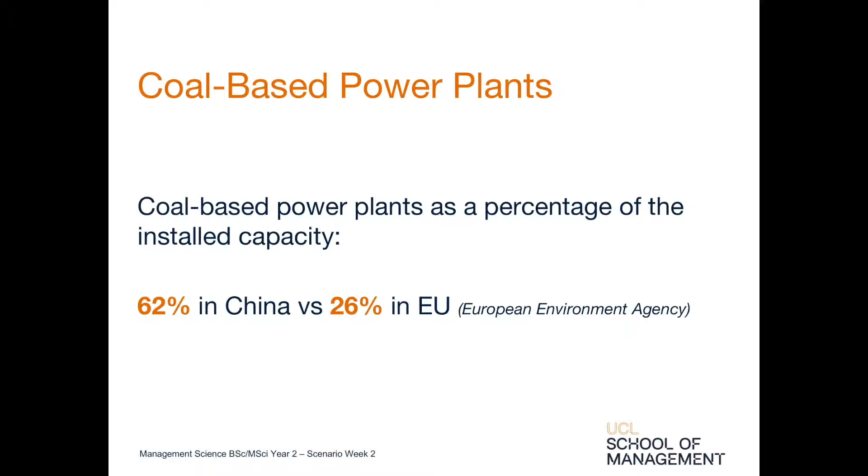China's 12th five-year plan from 2011 to 2015 explicitly called for the retirement of small, aging and inefficient coal plants. The plan introduced a national carbon trading scheme after 2020, while in 2011, 6 provinces and cities were given a mandate to pilot test a carbon pricing system scheduled to launch as early as 2013. Regulations became stringent where PM 2.5 emissions from new plants after 2012 could not exceed 20 mg per normal cubic meter. Regulations on existing plants soon followed after 2014.

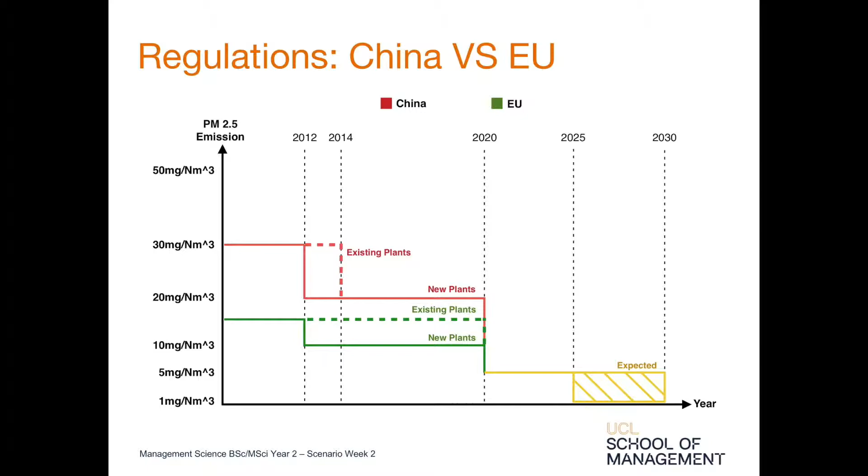The European Union, on the other hand, had stricter regulations on PM 2.5 emissions prior to 2012, at 15 mg per normal cubic meter. According to the regulatory report by the International Energy Agency, new regulations imposed until 2020 included a maximum PM 2.5 emission of 10 mg per normal cubic meter. The report also expects regulations in both regions to be tighter after 2020, capping PM 2.5 emissions to a maximum of 5 mg per normal cubic meter.

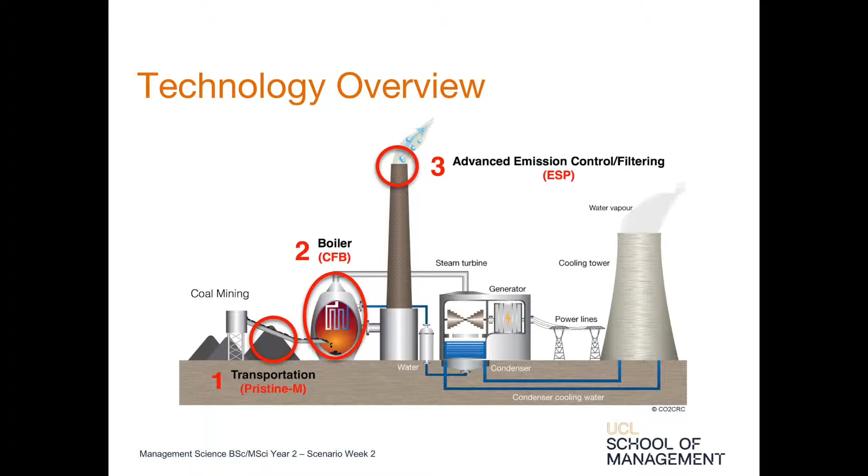This video will focus on 3 key technologies: Pristine M, circulating fluidized bed, and electrostatic precipitators.

We can classify coal upon its stability and quality. Unstable coal emits large quantities of particulate matter in the air during transportation. The specific type of particulate matter released is known as PM 2.5, which is transported long distances and suspended in the air for a prolonged amount of time.

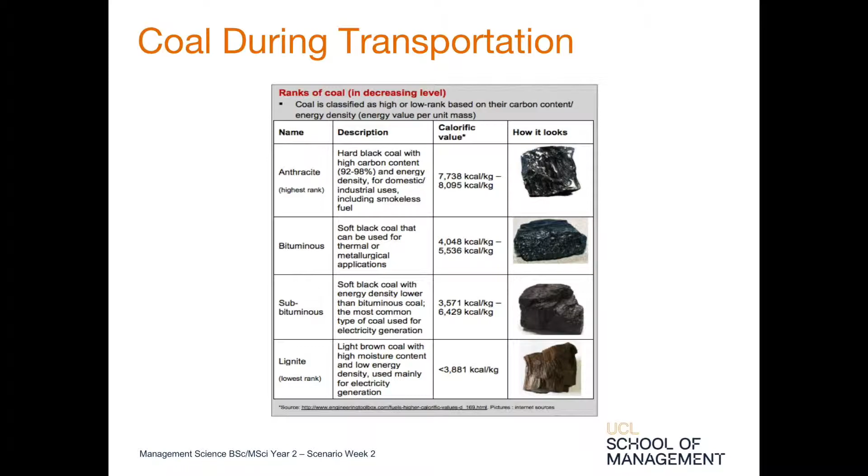To meet future regulations, particulate matter could be reduced at this stage by making the coal more stable. Regulations around the world are getting more stringent, and we can assume most countries will ban the use of low-rank coal due to its instability and high pollutant characteristics. China, which accounts for 45% of global coal consumption, has banned imports of low-rank coal with ash content higher than 16%, sulfur content higher than 1%, and particulate matter above 20 mg per normal cubic meter.

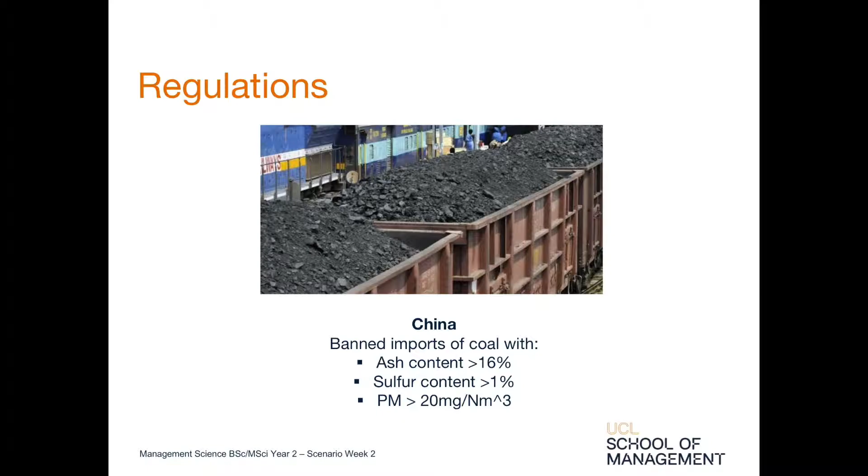Having a higher ranked, stable coal will enable Adaro to keep exporting sustainable energy for use.

By looking closer at this company, we found one of its newest technologies, Pristine M. The technology, just tested last August and validated in October, upgrades low and medium rank coal into premium fuel. Pristine M extracts the volatiles and moisture from coal in liquid form and then coats the coal with it.

This fills in the pores and makes the coal stable and good for transport. It removes moisture from 50% to 10% and improves the calorific content to 6,668 kilocalories, as well as lowering pollutants and increasing efficiency when burnt.

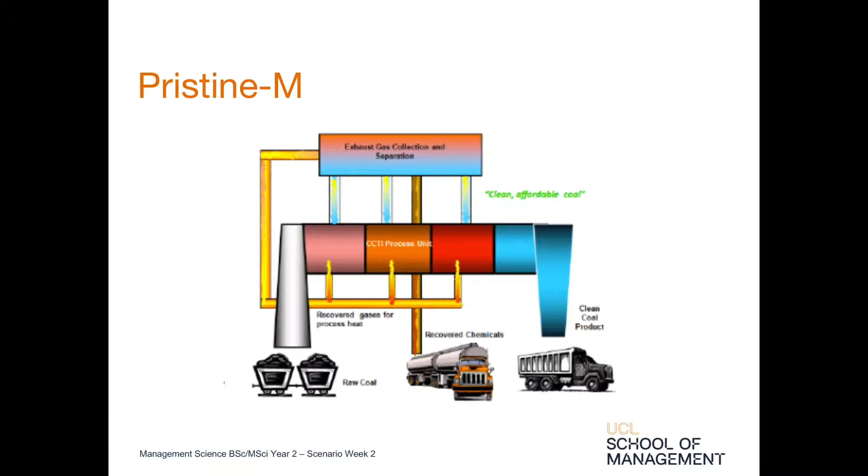So how about the cost efficiency of this technology? As we can see on the table, this technology doesn't only help reduce PM by creating a stable coal, but also multiplies the market price of coal by 2.5 times.

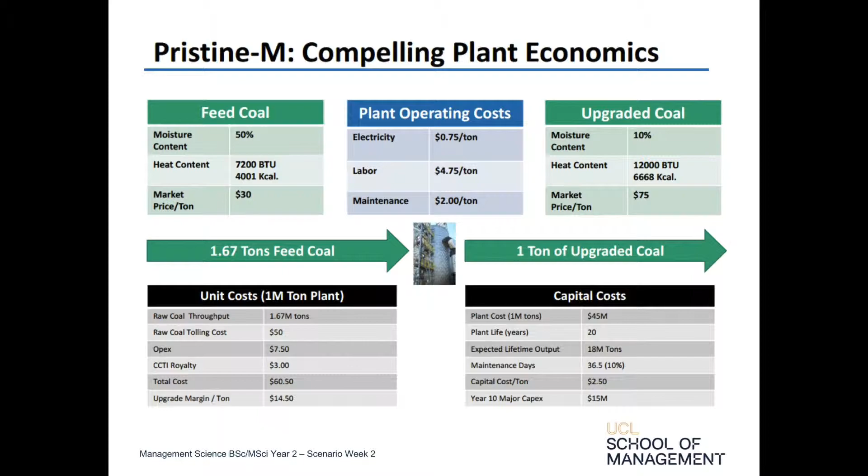The table also illustrates the cost of the technology in electricity, labor, maintenance, and capital costs. This technology has an expected life of 20 years for a price of $2.50 per ton. Pristine M will enable us to have a stable coal for good transport use and meet future regulations.

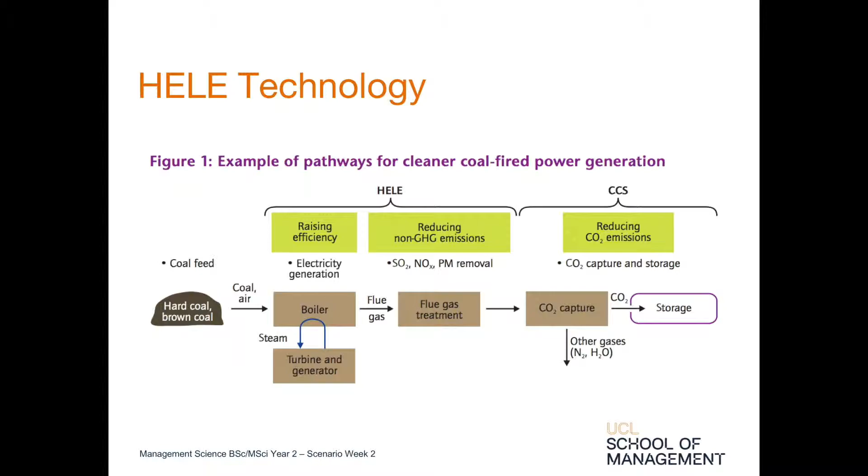HELE technology stands for High Efficiency, Low Emissions Coal Technologies. They incorporate measures to raise both plant efficiencies and reduce non-GHG emissions.

PC boilers had maintained a dominant role in coal power generation since the early 20th century. However, more recent boiler technologies have been developed to replace the original PC-powered plants. The two main technologies are IGCC and CFBC. We decided to focus on CFBC technology due to its similarity to the original PC units and its potential for economical retrofit of aged PC boilers with the relatively new CFB technology.

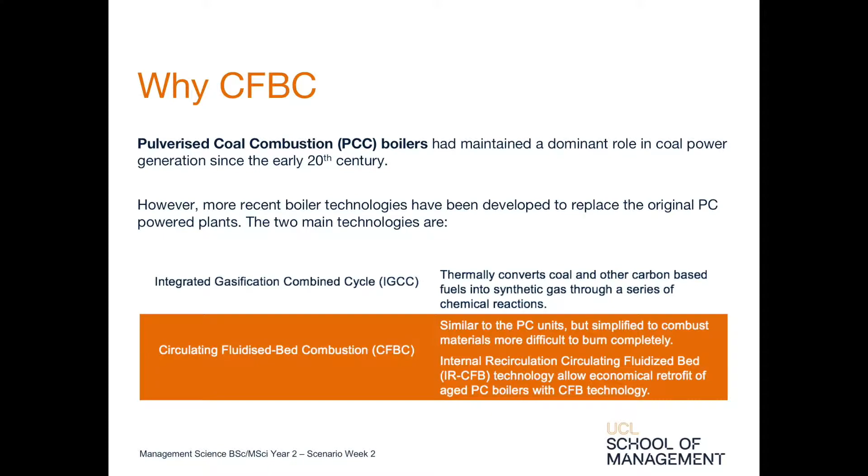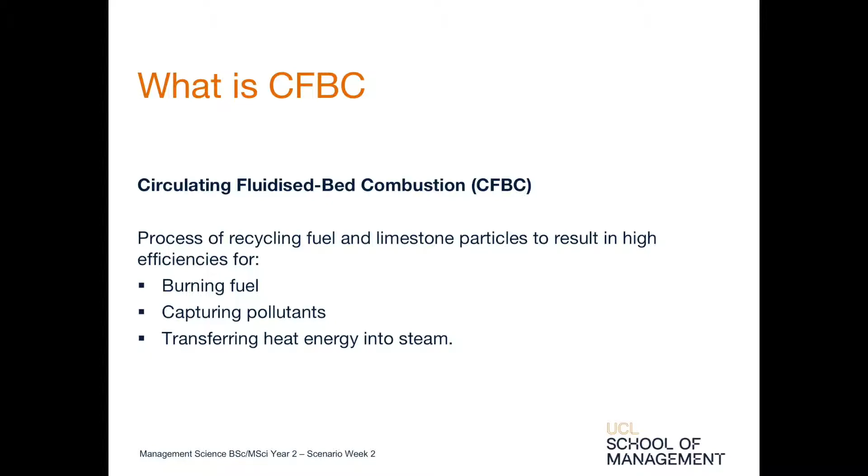The internal recirculation CFB technology has become a viable long-term solution for upgrading power plants and extending plant life for another 20 to 25 years. So what is CFBC? CFBC is a process of recycling fuel and limestone particles to achieve high efficiencies for burning fuel, capturing pollutants, and transferring heat energy into steam. In step 1, fuel and limestone are fed into the combustion chamber while air is blown into the fluidized mixture.

Step 2, heat from the combustion process boils the water in the water tubes, turning it into high energy steam. Ammonia is injected to further reduce nitrogen oxide emissions. Step 3 returns ash and unburned fuel to the combustion chamber for reburning.

Step 4, lime is injected into the polishing scrubber to capture more sulfur dioxide, while a particulate control device known as the baghouse collects dust particles.

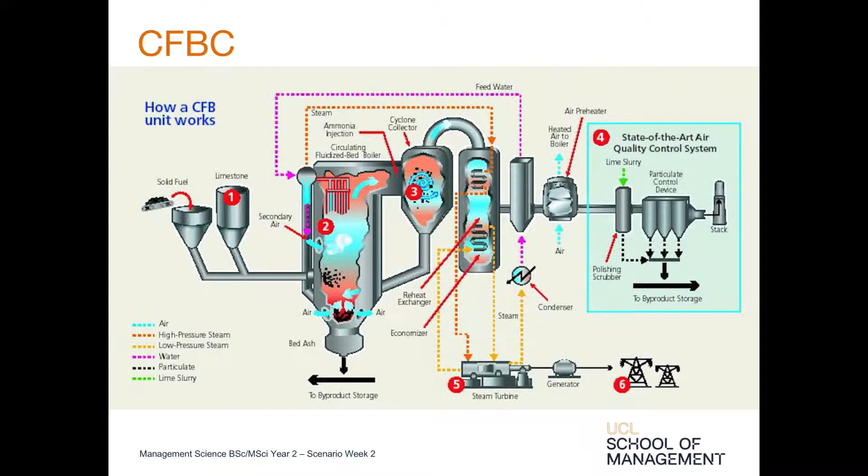Step 5, high pressure steam spins the turbine, which converts mechanical energy into electricity, and the last step, it is delivered to distribution systems. CFB's rate of heat energy transfer can be as low as 40% of conventional PC units.

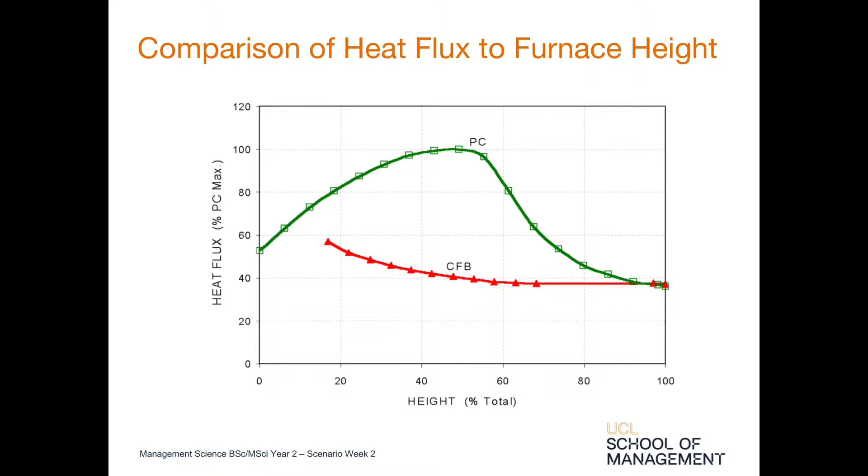CFB furnace tubes do not experience a significant rise in tube temperature, even at dryout, because of the low heat fluxes. An example of a CFB power plant is the 460 megawatt electrical plant in Łagisza, Poland.

Commissioned in June 2009, it is the world's first CFB technology with vertical tube, single unit, supercritical steam technology.

The implementation of CFB technologies have increased plant efficiency from 35% to 44%, while reducing nitrogen oxide emissions by 71% and carbon dioxide emissions by 28%.

The following is a case analysis when running a 600 megawatt net CFB supercritical plant operating at 90% capacity factor. There is a reduction in capex due to less equipment required, but there is a potential arbitrage of $14.6 million per year fuel savings and a 10-year NPV fuel arbitrage of $95 million.

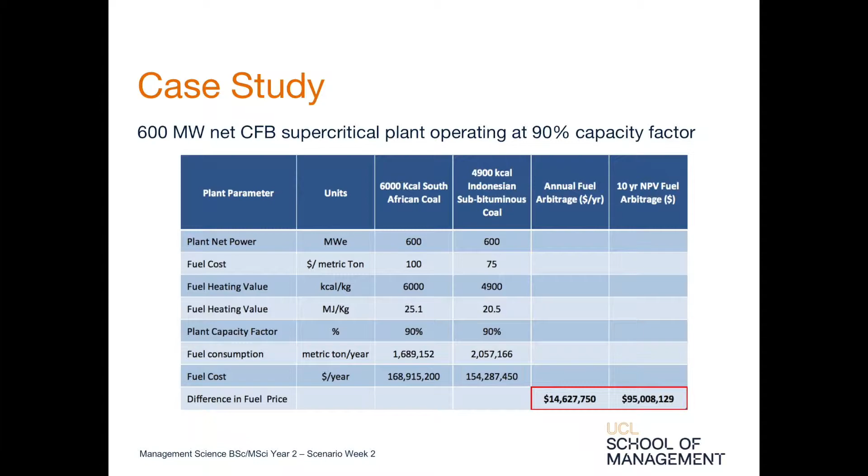The global trend is moving towards carbon capture and storage incorporated with HELE technology to meet more demanding regulation targets. China's 12th five-year plan capped coal production at 3.9 billion tons by 2015, while imposing that all plants of 600 megawatts or higher must incorporate supercritical or ultra-supercritical technology.

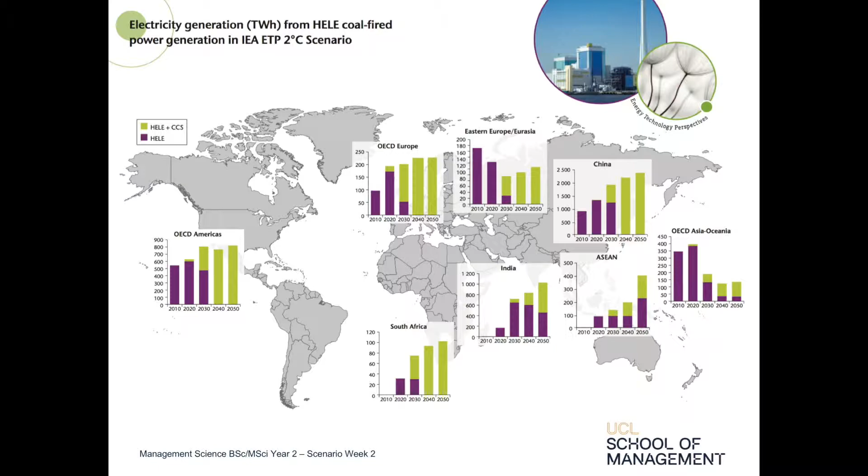Hence, the carbon intensity targeted by 2015 has been reduced by 17%, and is expected to reduce by 40 to 45% by 2020. The following roadmap identifies technology implementations to meet the rising regulatory standards in major Asian countries.

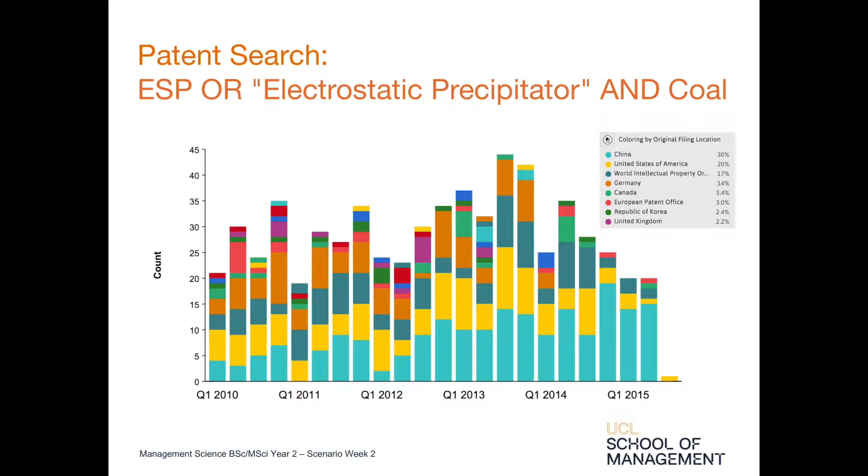Particulate control and dedusting is required as flue gases created by the coal-fired combustion processes are loaded with PM and require cleaning before release into the atmosphere. Dedusting devices enable this, and continuous monitoring of dust concentration is needed in order to comply with regulations.

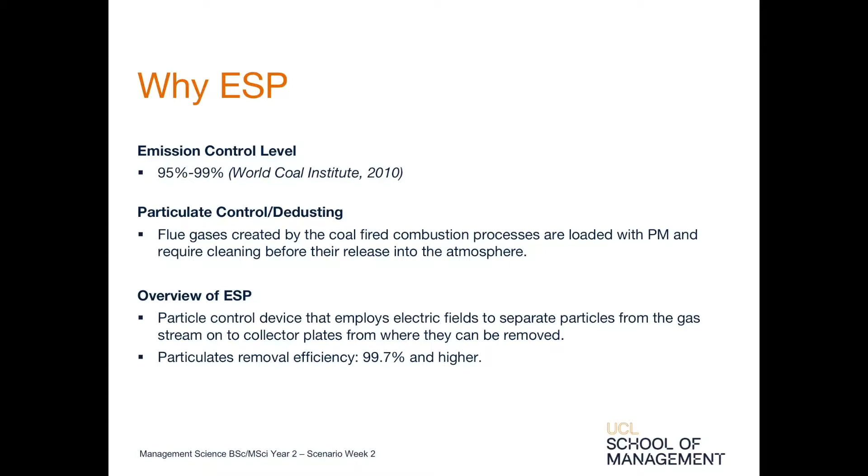ESP is a device that employs electric fields to separate particles from gas streams onto collector plates, from where they can be removed. Particulate removal efficiency is 99.7% and higher.

The performance characteristics depend on electrical resistivity and particle size distribution, as well as gas conditions and gas temperature.

Improvements are required to comply with the regulations from 2010 to 2020, and therefore, to achieve less than 50 mg per normal cubic meter of outlet emission, the following actions can be adopted.

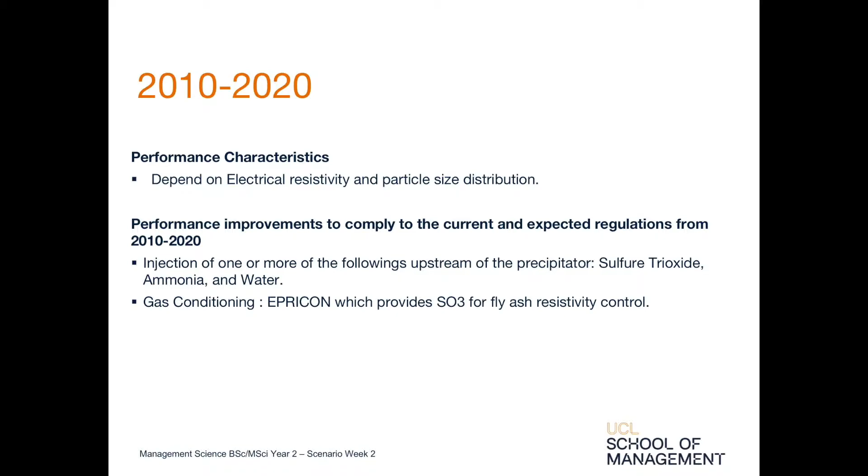First, injection of one or more of the following upstream of the precipitator: sulfur trioxide, ammonia, or water. Second, gas conditioning. We can observe on the table that for emissions of PM equal to 50 mg per normal cubic meter, ESPs are more cost effective than fabric filter, another dedusting technology.

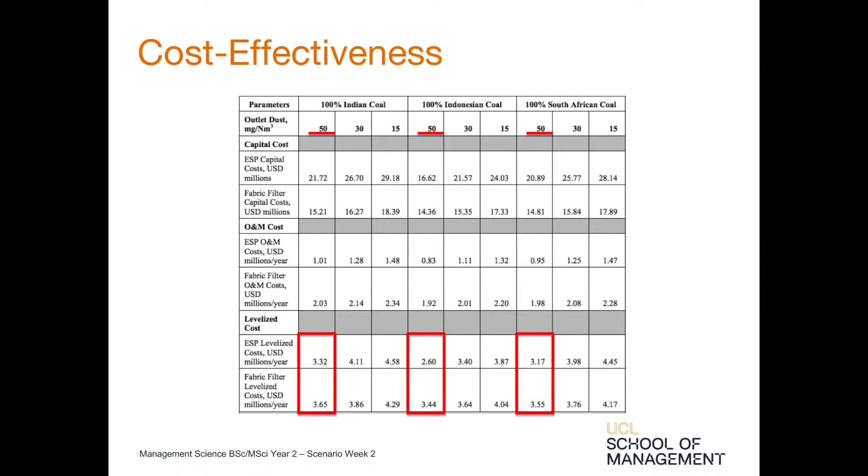However, reducing the emissions demonstrates a new situation in which fabric filters appear to be more cost effective than ESPs. Hence, we need to consider other performance improvements for years to come to overcome the need for fabric filters.

The main difference between wet and dry ESPs is the use of a pre-quench and the collector plate cleaning method. Wet ESPs make no dust entrainment and are not affected by dust resistivity.

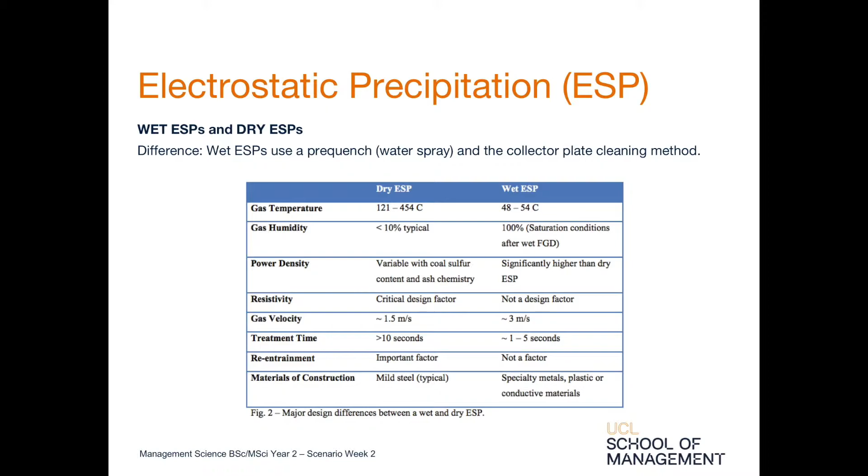They seem like a good fit to comply with stronger regulations that are predicted to be implemented in China between 2020 and 2030. China could aggressively reduce PM emissions to as low as 1 mg per normal cubic meter, and this could possibly be extended to other countries.

Many power plants are currently equipped with dry ESPs, followed by wet FGD systems for PM and sulfur dioxide control. Wet ESPs are especially suited to control filterable and condensable particulate matter less than 2.5 microns.

To meet the new regulations, wet ESPs need to be used downstream of wet FGD systems as a polishing device in the air quality control system. We can observe on the graph an equipment configuration that meets the PM limits in China.

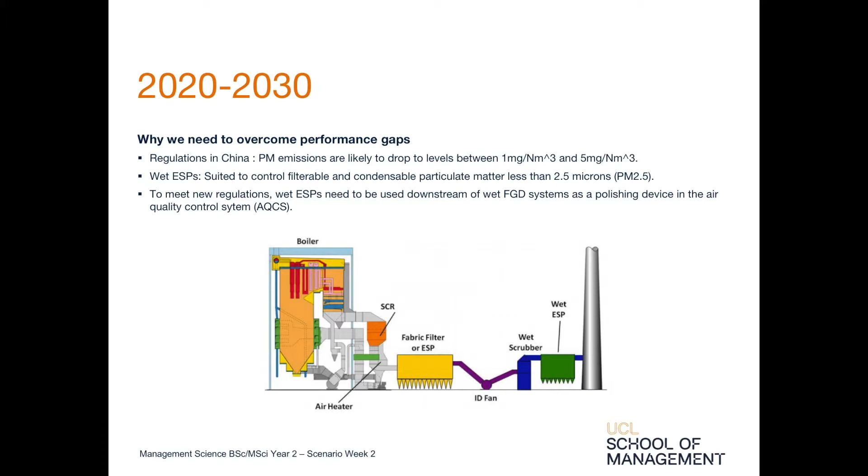To conclude, incorporating the various technology elements outlined in this video has the potential to heavily reduce the emittance of particulate matter from coal-fired power plants, as depicted in the graphic.

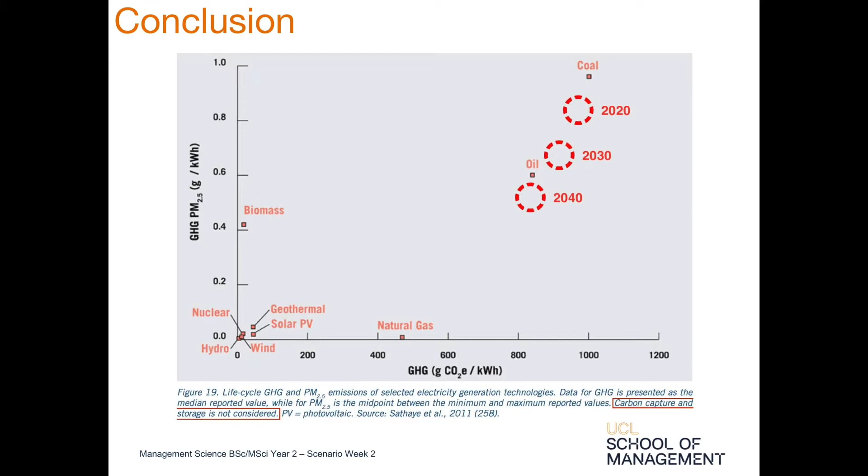The introduced technology improvements will allow power-generating firms such as Adaro to keep using coal as a source in the future and meet the ever-toughening regulations in China and Asia as a whole.

Taking Shanghai as an example, around 80% of PM is emitted from coal power plants. With our technologies, the emission rate could be reduced by approximately 70% by 2030.

PM levels will then drop from 40 to 12 microgram per cubic meter. Furthermore, according to the WHO, reduction from 70 to 20 microgram per cubic meter could reduce the number of premature deaths by around 15%.

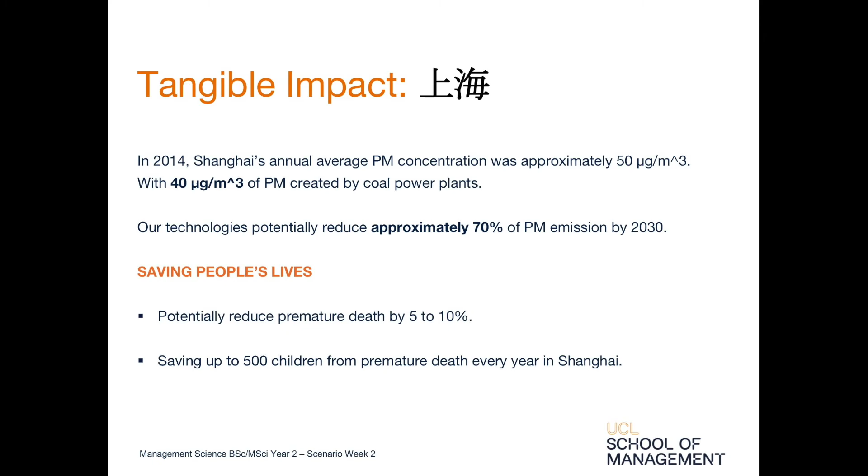Based on this, we assume that going from 40 to 12 microgram per cubic meter could decrease the number of deaths between 5 to 10%. Therefore, our new technology could prevent up to 500 premature deaths in Shanghai every year, let alone other health benefits for asthma patients and respiratory diseases.